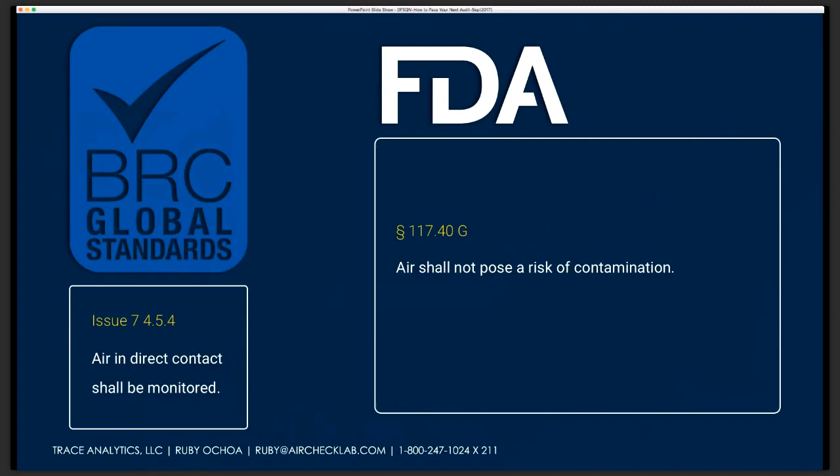BRC says air in direct contact should be monitored or shall be monitored. FDA says air should not pose a risk of contamination. IFS says air in direct contact shall be monitored, and compressed air shall not pose a risk of contamination. Primus says air in direct contact shall be monitored regularly.

SQF has quite a bit more information in the various documents that they have. The requirement is, and you'll note that this is edition 8, which goes into effect in January, they've added a little bit, they've added some things to it. So air and gas in contact shall be monitored. They're talking about if you're using nitrogen or oxygen or carbon dioxide, those also need to be monitored. And then they also added the word systems - systems must be maintained and monitored.

What they mean by systems - you've got a compressor, but you've got a compressed air system that includes the receivers, the piping, and all of that is what should be maintained and monitored, and of course the filters. One of the things that is in an FAQ on SQF's website is that air at the point of use should be filtered with a 0.01 micron filter.

Just so you'll know, at the very end of the presentation, we've got a couple of slides with links that will take you to a variety of information that we talk about during the presentation. Specifically, there's one there for SQF. They have quite a few different references to compressed air and recommendations that you will find useful.

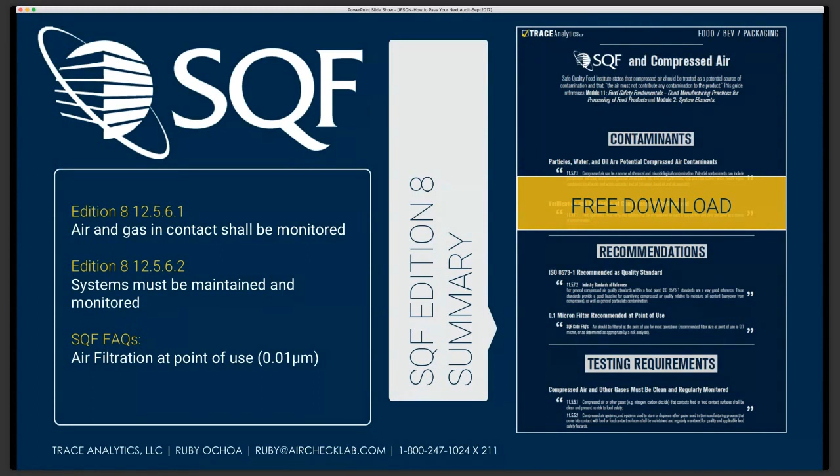So this is just a slide that we keep showing. We keep looking for who out in the world is required to monitor the quality of compressed air, or who has regulations, who has specifications designated. This is just a little brief overview of those that we found that in some form or fashion have referenced ISO 8573. And I think Canada has their own requirements.

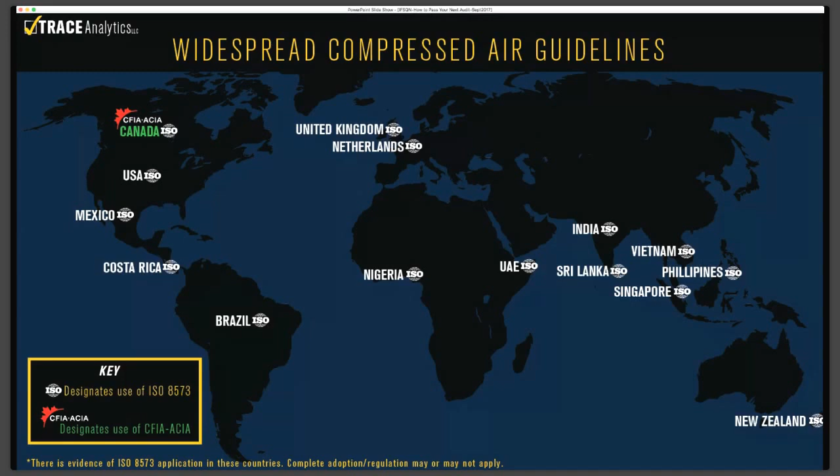So this brings us to our very first polling question. Does your country regulate compressed air quality in the food industry? Okay, so far we've got some from Canada and the USA, which were already on our map.

In the next few slides, we're going to take the same HACCP principles you're familiar with and apply them directly to your compressed air system. With this information, you'll be able to document for your auditors that you are ensuring that compressed air is not going to contaminate your product.

So let's start with principle 1: identify hazards that must be controlled to acceptable levels. So what's the definition of hazard? A biological, chemical, or physical agent that is reasonably likely to cause illness or injury in the absence of its control. This is easy, you don't have to go digging very hard to find out what those are in compressed air. The experts, like the Compressed Air and Gas Institute, ISO 8573, they all state that particles, water, oil, and microorganisms are the potential contaminants for compressed air.

Of course, untreated compressed air does contain contaminants, and they have to be removed or at least reduced to an acceptable level through filtration when used for food manufacturing, pharmaceutical, or other critical applications. You certainly wouldn't use the same quality air that you would for, say, sandblasting or jackhammering rocks — that's a totally different application. Compressors used for critical applications are filtered to make the air safe for contact with your product.

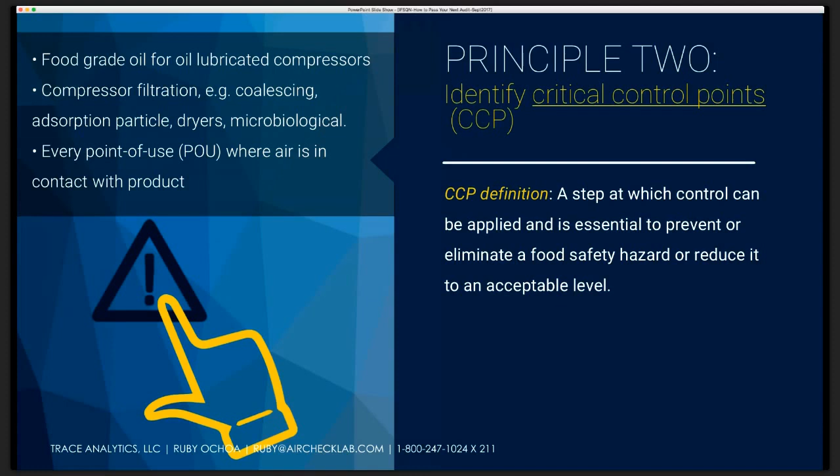Principle 3: establish critical limits for your critical control points. So that's where the engineers that determined what type of compressor system and filtration, they would have come up with those types of recommendations for the filtration, like you could use a refrigerant dryer or a desiccant dryer, depending on your product. Those type of systems are already in place. Then there's your point of use filters, where you can adjust the quality based on your product. And SQF recommends that...

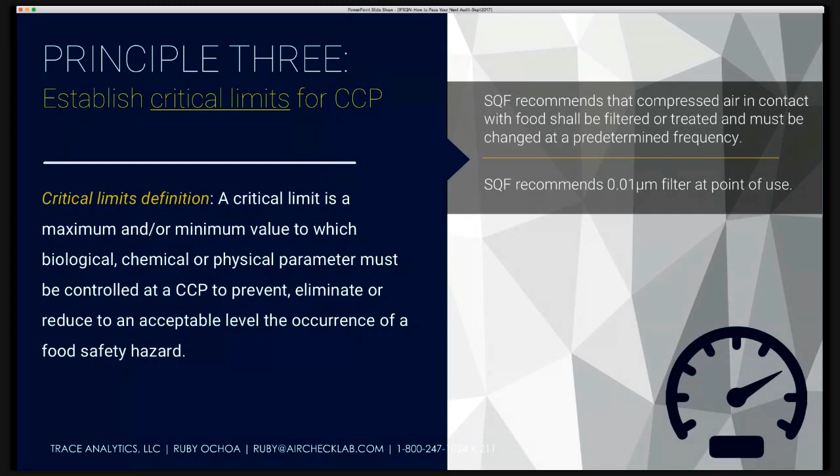At the point of use, you should use a 0.01 micron filter. And here's why: that point of use filter is your last defense before the air hits your product. A 0.01 micron filter is going to remove bacteria, mold, yeast — your microorganisms. And these are the common ones that when we do a total plate count, that we're checking for.

Principle 4: implement monitoring at a critical control point. So what is monitoring? To conduct a planned sequence of observations or measurements to assess whether the critical control point is under control, and to produce an accurate record for future use in verification, which is a further step down in the HACCP plan.

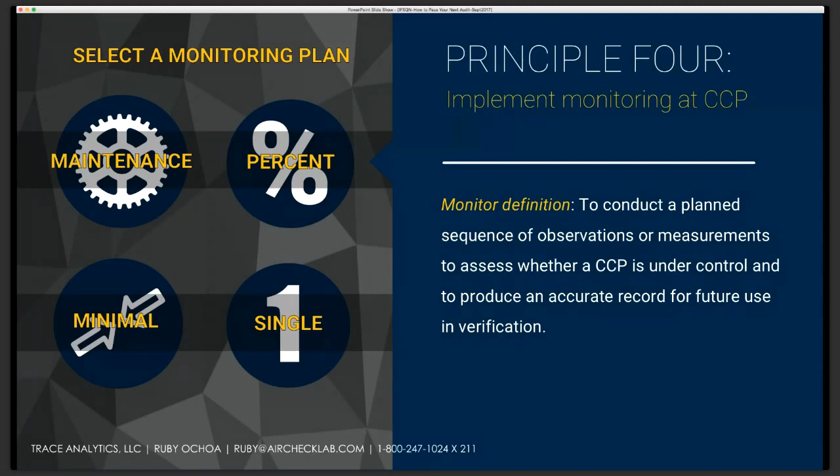Principle 5: establish corrective actions when not in control. These are the procedures followed when a failure or deviation occurs. Your HACCP plan establishes a strategy to prevent, eliminate, or reduce contamination. However, sometimes deviations occur, so what do you do?

If you get air test results showing a failure for particles, microorganisms, or another contaminant, you first have to determine if it has affected the safety of your product. That's why it's important to have individuals assigned to this task who have a thorough understanding of the process, your product, and the HACCP plan.

Your written plan should identify if there are further steps in the manufacturing process that will lessen or eliminate the risk. In other words, if there's a kill step after the compressed air has touched your product, then that risk is very low, because you've killed any of the microorganisms that might be present.

Then you need to identify the cause of the failure. It could be as simple as the filters weren't replaced when they should have been. You might find out there's a malfunction of the compressor, maintenance is past due, or even a dirty nozzle or a piece of tubing connected after your point of use filter.

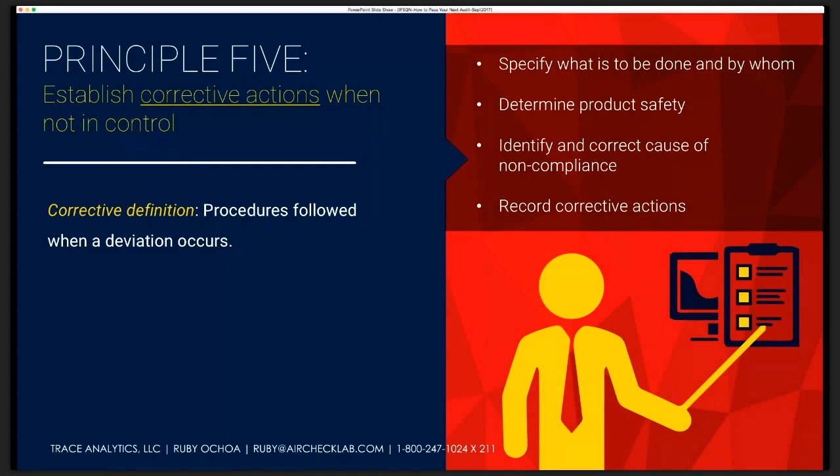Principle 6: establish verification procedures. Those are activities other than monitoring that determine the validity of the HACCP plan and that the system is operating according to the plan. So verification is defined as those activities. Well, what are those activities when it relates to compressed air?

Well first, you have to start by looking at your original HACCP plan. Make sure it's still applicable today. Make sure that if you made any changes throughout the year, either to your compressor or piping, that they are now reflected in your HACCP plan.

If you have a robust HACCP system, then you shouldn't require much in-product testing, because the plan will have built-in safeguards. That's why the verification step is so important.

You should have frequent reviews of your HACCP plan, verify that the plan is being correctly followed, review the results of your critical control point monitoring, and the corrective action records. You may need to perform further validations of your plan whenever there's an unexplained system failure, you add a new product or process, or you identify new hazards.

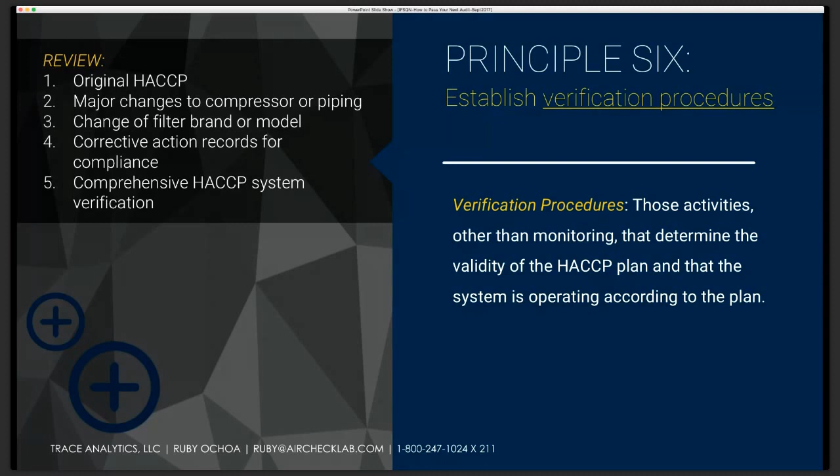Here's an example of a HACCP verification schedule. There'll be a link to this at the end of the presentation. I found it on the FDA's website. It's a nice table for you to look at. You could very easily implement something like this, listing all the activities you're going to do, and include the frequency, who's responsible, and who's reviewing it.

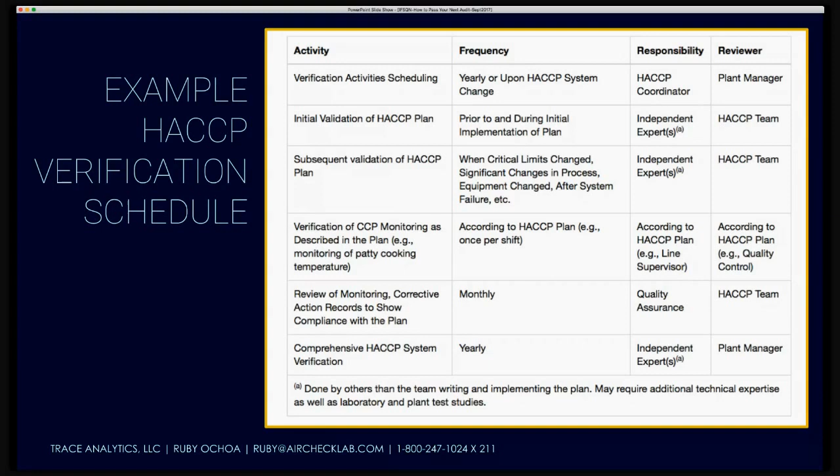Establish record-keeping procedures, that's principle 7, the final one. We all know what record-keeping procedures are, right? But here's where you want to gather all the information regarding your compressed air system. Include your risk assessment, the limits you've selected for your critical control points, your air test results, any corrective actions, training records, sampling procedures, schedules—all of this in one place. So hopefully when the auditor is asking you questions, you've got it all in one folder.

You also might want to check out a previous webinar we did in July of this year. We talked about how to perform a risk assessment, and it was an hour long, so I can't go into that today, but it's recorded and on this website. Just go look at the free Friday webinars, and you can type my name in, or type in the company name, Trace Analytics.

There's also, if you do a search on IFSQN's website, you'll find some articles that we've written. And the very first webinar we did back in 2015 goes into pretty good detail about the contaminants and how they occur—the ones that come from the intake air, the ones that come from the compressor, and those that might be created in the piping or the receivers.

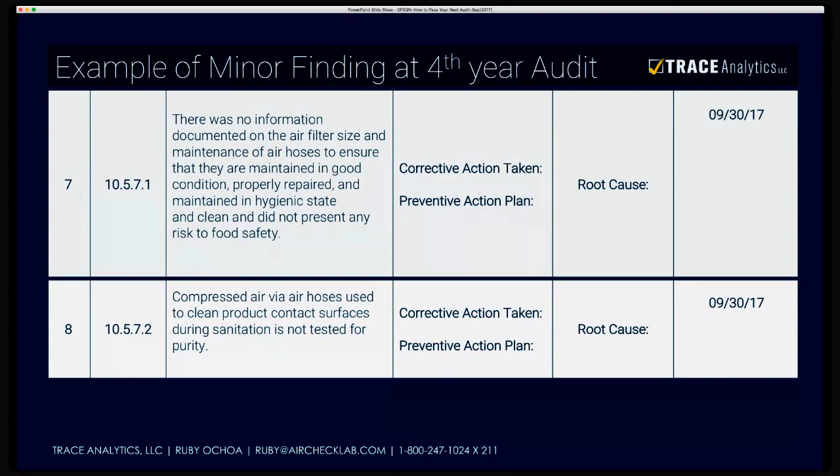So here's what he responded to the audit findings. Obviously he contacted us immediately, and we were able to help him get the testing done that he needed. Normally I think he was given 2 weeks to fix everything, and that particular auditor did not budge about the timing. Usually they'll give you a little bit more time because bugs grow really slowly—when you do a micro test, it takes a while for them to grow; they don't just happen overnight.

Nevertheless, he was able to handle part of his minor findings, but the first one was rejected. He had implemented, as you can see, a complete preventive maintenance program with filter changes and documentation of the filters, etc. But the auditor came back saying, 'you didn't talk about your hoses—provide me a maintenance program on monitoring air hoses to ensure they are maintained in good condition, properly repaired, and kept in a hygienic state.'

So yesterday he sent me what he wrote back to them, and I'm pretty sure it's all going to be finalized. He added additional information about how the hoses were going to need to be checked daily—visually, for whether they were stiff—as well as the position of where they needed to be on the wall, things like that. So I just thought I'd provide this; thought you might find it of some use.

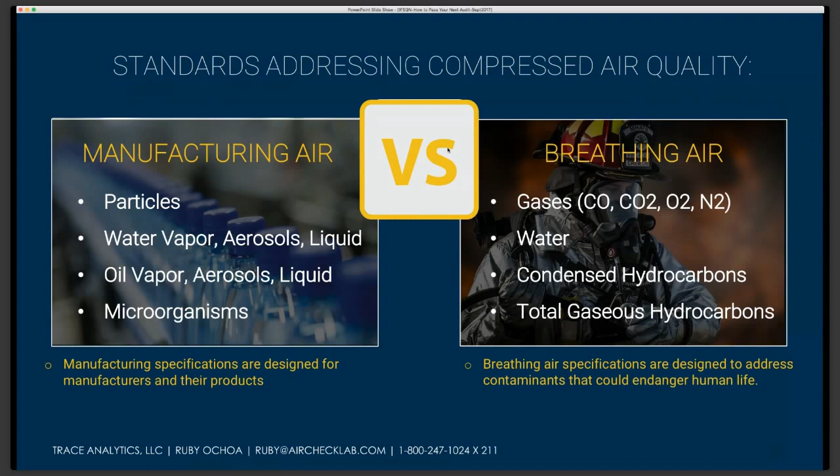Then you go into a different measurement for particles, where we're not looking at particle size or quantity of particles, but simply weight by mass. These are generally class 6, commonly used for pneumatic tools.

Then we've got the category of water. Classes 1 through 3 would be for a desiccant dryer, and the purity levels for class 4 through 6 would be for refrigerant dryers. You'll notice there is a liquid component to it, and this would be an extreme level for particles as well as for oil. At those points we're not talking about monitoring, we're talking about trying to figure out where the contamination came from and how to clean it up and fix it.

So the purity classes you're concerned with are those 1 to 5 in particles, any of the ones in water 1 through 6, not the liquid. For oil, class 1 and 2 are a little different than the others, because ISO 8573 states you should test it two different ways: one is to capture oil vapors, and one is to capture the oil aerosols. Together, those two readings will need to meet these limits: 0.01 milligrams per cubic meter for oil class 1, and less than or equal to 0.1 milligram for class 2. When you get to class 3 and 5, you don't need to do the oil vapor analysis because it would be insignificant at these levels.

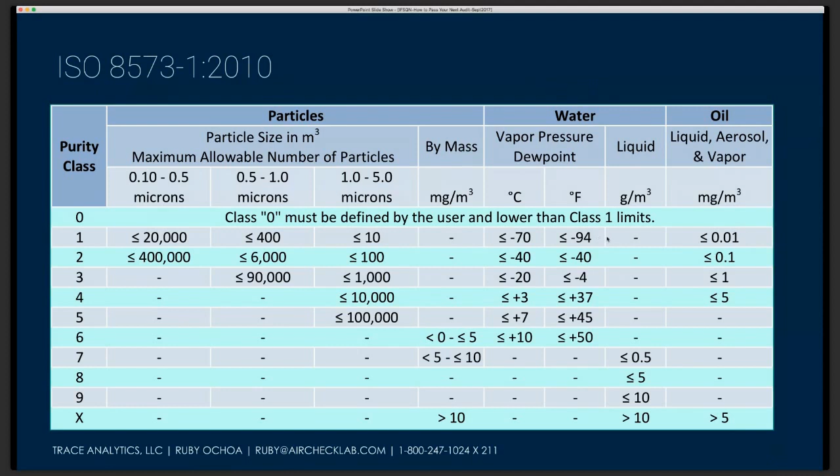This is a chart we put together categorizing the purity classes for you. If it's a high risk, critical application, you could look at classes 1 to 2 for particles, 1 to 3 for water—that's a desiccant dryer—and 1 or 2 for oil. If you've got medium to low risk, then this range of purity classes might be appropriate for you. And remember I mentioned that class 6 for particles is typically for pneumatic tools, so this would be no contact. You wouldn't be worried about this unless you have an instrument that requires some type of filtration and it falls into these ranges.

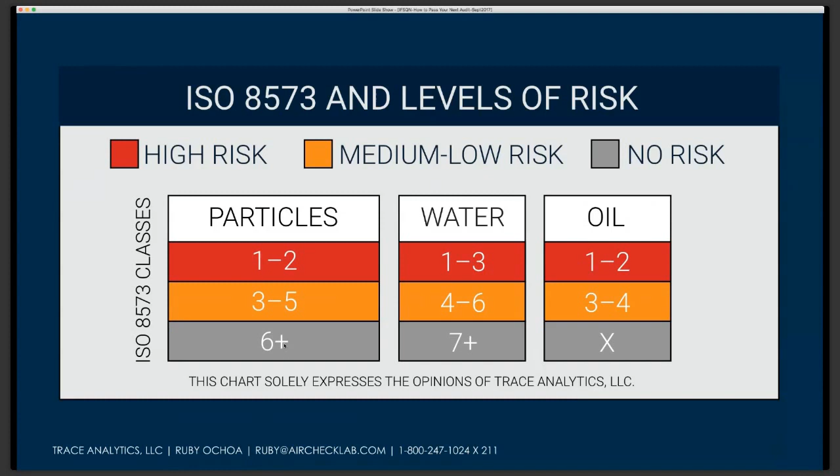These are just guidelines. Here are some specifics from the British Compressed Air Society. They've got an excellent guideline that talks all about compressors. It is a free download. I don't remember if we put it on our... yes, we did put it on our last two slides, so there'll be a link where you can go download that.

They recommend semi-annual testing of your compressed air, in that if it's direct contact, your purity class should be a class 2 for particles, 2 for water, and 1 for oil. If it's indirect contact, then it would be a 2 4 2. These readings, when you see them in brackets like this, usually you're going to have ISO 8573-1, and then the version of that document, which is currently 2010. In brackets it will always be in the order of particles, water, and oil. If you use that type of description, you can very easily communicate to your laboratory, to your filter manufacturer, to your compressor manufacturer—we can all speak this common language.

Now the second chart here—these are not recommendations, these are strictly examples of what some of our customers do. In some cases you'll see they're completely different. It's still a bread product, right? But this one chose a 242, this one chose a 222. I've got packaging companies that do a class 242. I've got a soft drink manufacturer that goes to the very, very extreme of 111—that's a tough spec to meet. Baby food, they performed their risk analysis and came up with these numbers based on the products. In some cases you may have numerous products that could have different purity, so that's where you could adjust your filtration at the points of use.

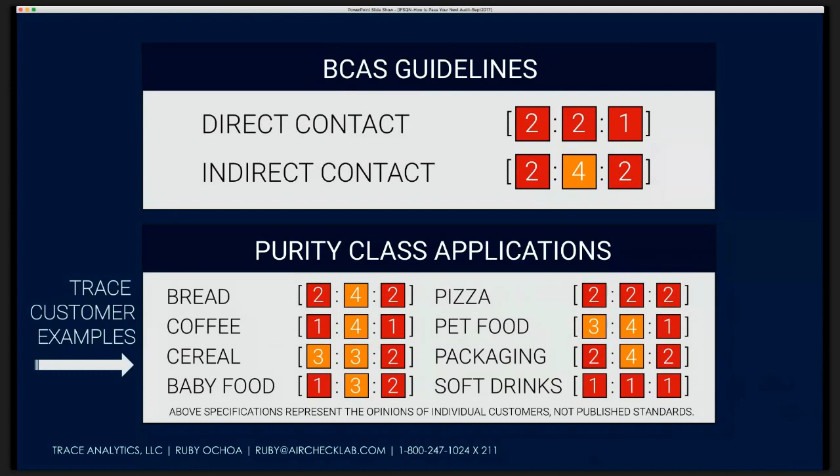Okay, so now let's get to the requirements for microbiological testing. I wish I had more for you—they're just not out there. Even BCAS doesn't state it. ISO 8573 doesn't have a limit, although I heard they are working on it, so maybe in the future we might have better guidance in that regard.

But for now, what some of our clients do is use their environmental limits that they have. Some of them try to apply their product limits. In some cases the findings from micro testing are so low that they know it's perfectly acceptable. So let's keep looking—if you find any, send them my way. We're always searching for this kind of information.

So we're going to talk—oh goodness, we're running out of time. I'm going to need to hurry it up. We're going to talk a little bit about...

How would you take a sample? This isn't full detail, just giving you a glimpse. We collect particles with a pre-weighed filter, a membrane that collects particles. First, you run a known volume of air through it, and depending on the purity class, it can take a couple hours or as little as 15 or 20 minutes to take the sample. Once we get the filter back into our lab, we look at that membrane under a microscope and count how many particles we see by size.

That does limit us to only being able to look at particles 0.5 microns and higher. If you require the first range, as you remember from the purity classes of class 1 and 2—the range of 0.1 to 0.5—we can accomplish that for you as well, using a laser particle counter to gather that information.

For water, we use a length of stain detector tube. It's a simple 5 or 10 minute test—I think it's 5 or 12.5 minutes, depending on if it's a desiccant dryer or a refrigerant dryer. When moisture contacts the chemical inside the tube, there's a reaction and a color change occurs. We then convert that information to pressure dew point.

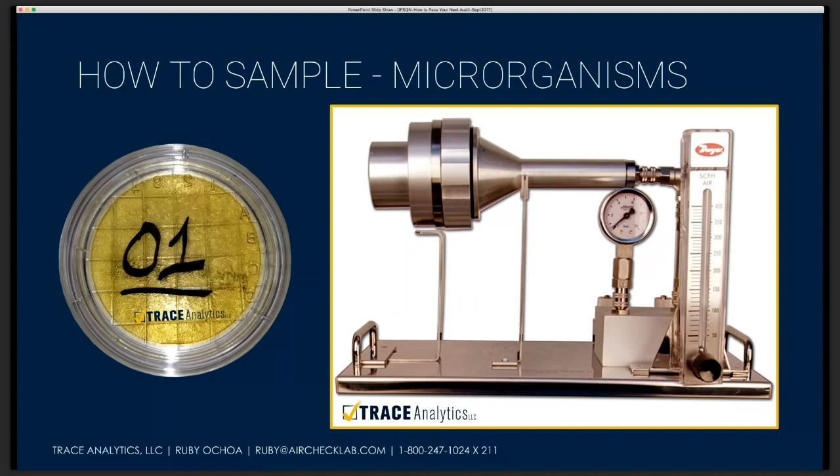One of the other things we frequently find—I think I mentioned before—is that in some environments at facilities, the ambient air is full of your product: fine dust, powders. This makes it very difficult, if not impossible sometimes, to get a clean sample from your compressed air. But this is a 10-minute test, and it's really not too difficult to do at all.

So, let's see, how are we on time? Yep, we're going to run through these last very quickly.

We know that one size doesn't fit everybody, so we've got a couple of different packages we provide. If you have specific limits, say a class 221 you need to meet, you'd fall into our pro package. If you don't know but want to start monitoring and gathering enough information to set corporate guidelines, we'd recommend a baseline test. The full range of ISO 8573 classes would be available for both of these packages.

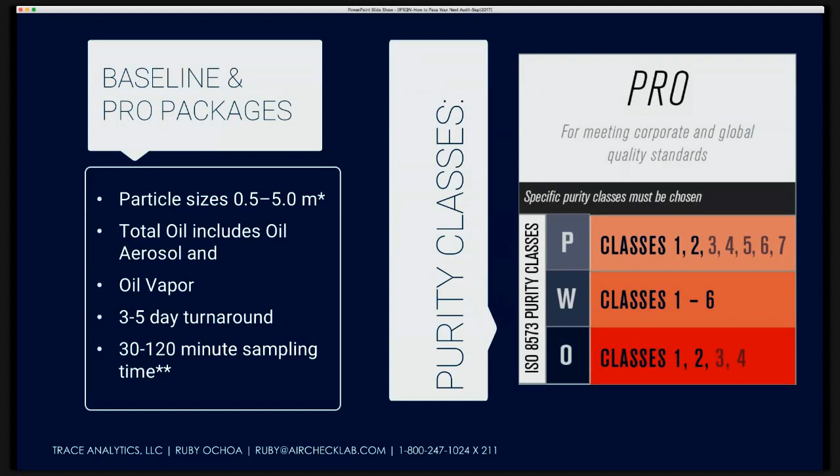The micro sampler, like I mentioned, is an impaction sampler. It's 10 minutes long, and we test for yeast, mold, and bacteria. Basically, it's a total plate count that we provide, and we can do gram staining and further identification.

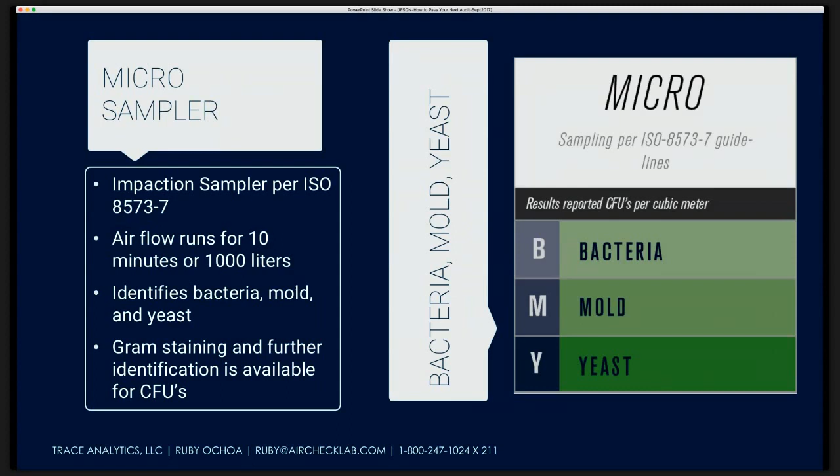Compressed air monitoring is a requirement for several of the GFSI schemes we talked about. They're all pretty generic in their comments, but the essence is you need to monitor your compressed air, and hopefully the HACCP principles we went through will be helpful when applying it to compressed air.

I briefly covered how to take samples, I'm sorry we kind of ran out of time, I talked too long. But what I do want to say is that our sampling and analytical methods are based on ISO 8573, which SQF recommends, and we trust is the right way to ensure the safety of your products.